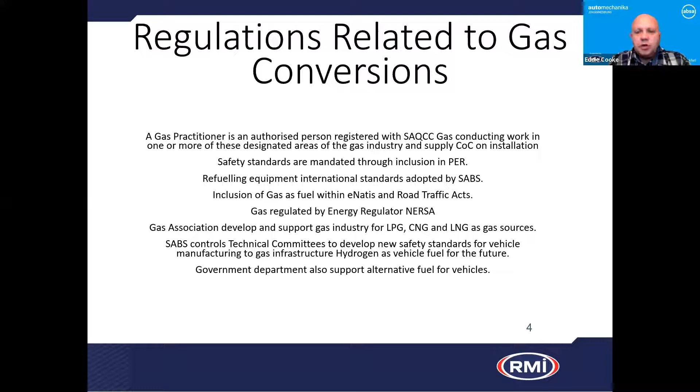What's also important is all the other governmental departments, the Department of Employment and Labour, Department of Mineral and Energy Resources, Department of Transport, all supporting the initiative of actually converting vehicles itself. Just as a background, how this all fits together, if you see the mandated regulations, firstly we've got the Department of Employment and Labour.

They use the OHS Act as their power into the industry. We've mentioned the PER, the Pressure Equipment Regulation, that looks at the gas industry itself and gas systems. And then for vehicles, we have SANS 15500, SANS 10087 Part 6, which is the LPG. There's SANS 20110 and 2067, which are adopted international standards, European standards. And then we've got the present CNG standards itself, and they all feed into the Safe Gas Equipment Scheme that would also regulate the quality of the equipment itself.

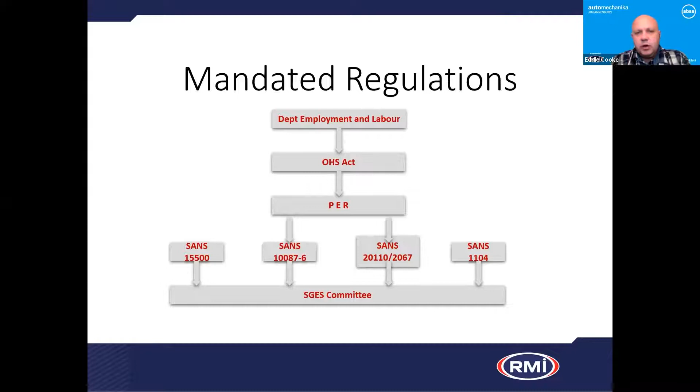But the question is, why would we want to start converting vehicles to gas? Firstly, there's more gas available in the world than the availability of oil. If we look at the current quantities of oil available, there's 5 times more gas available at this stage. And we all know everybody is moving away from a carbon footprint, reducing emissions.

This is a way to be more environmentally friendly by actually using alternative fuel sources for vehicles. Transport contributes quite a lot of emissions into our country, sometimes as high as 40%. And this is a way of actually reducing our carbon footprint itself.

Gas is also a lot cheaper, and that's why it's also much more beneficial to actually use gas as a fuel. We all know the current price hikes in fuel itself, and this would make it the ideal opportunity to start looking at the benefits of converting vehicles itself.

I've mentioned the future of hydrogen. We don't just believe in hydrogen as fuel cells, but also maybe hydrogen technologies for internal combustion. And as I mentioned before, autogas conversions

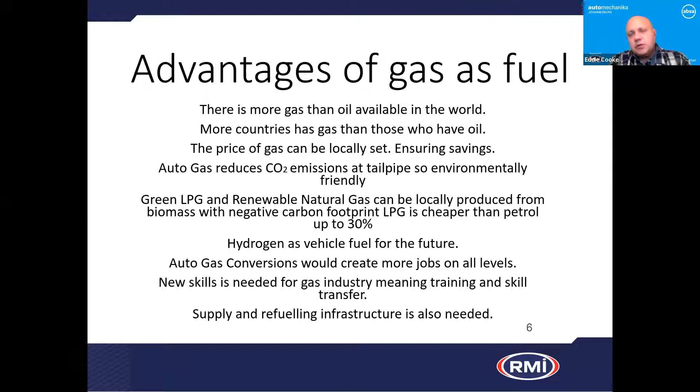has been done, but the more demand there is, the more jobs would be created, the more training and skills are needed to transfer this new technology into the market, and subsequently also we'll need more supply of refueling infrastructure, because the more vehicles there are, it's always the chicken-and-egg scenario. Must there first be a refueling station, or must there first be vehicles? You actually need both in the industry to actually make it work.

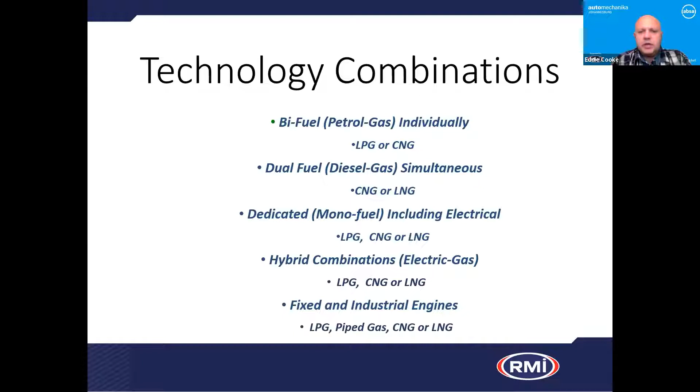There's quite a few combinations of technologies used with different applications, as you can see there, but I'll take you through it in more detail going further.

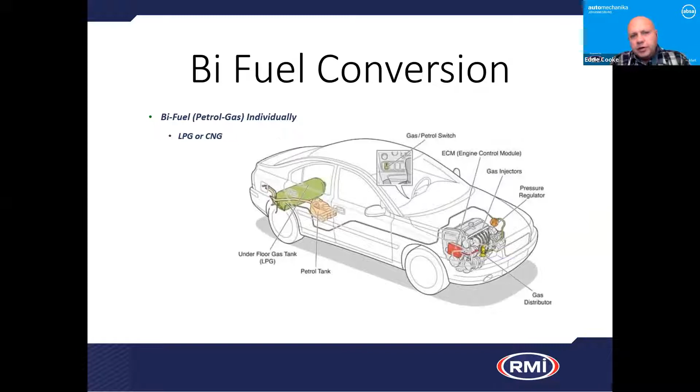Your normal bi-fuel conversion, normally LPG or CNG, which would be your petrol vehicle that you convert to gas. So you either drive on gas or you either drive on petrol. You can switch it over at any specific time.

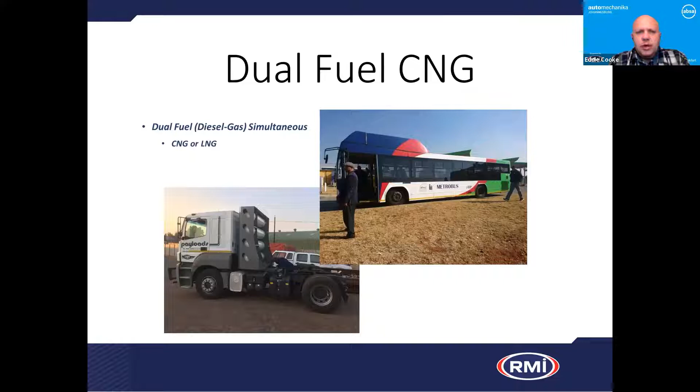Then you've got the dual fuel, and here I'm showing examples of the Johannesburg Metro bus, more than 140 buses already running on dual fuel for more than 5 years in the metro. So it's technology that's already happening in our country and being applied. Here you would normally use CNG or LNG itself.

Then further on, dedicated CNG. This is where you only use gas as a fuel source. You totally remove the petrol or diesel application and only run on gas. And this could also be done either LPG, CNG, or LNG itself.

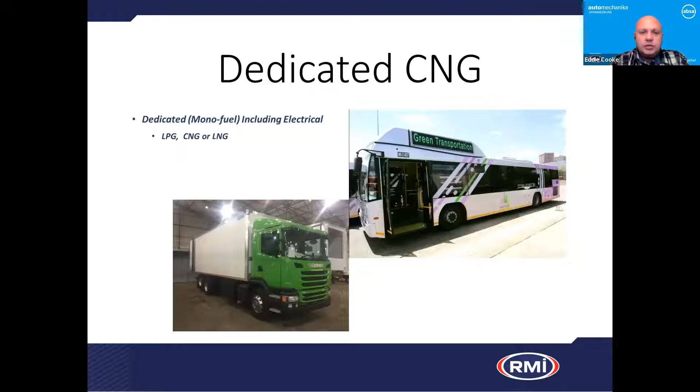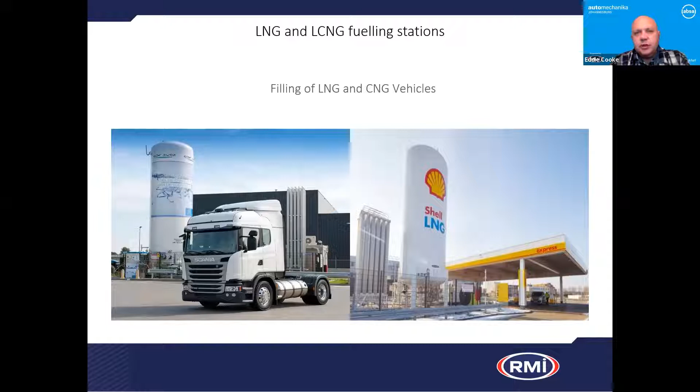And then going to the future as well, looking at LNG refueling stations, LNG vehicles. There are some tests being done currently in the country with some LNG vehicles. So this is some of the future that we are looking at, and we're starting to get ready to actually apply it.

I've mentioned hydrogen. It's a big topic, a lot of exposure to that in the last 2 years since COVID, but it will become a reality. It's all about getting to technology maturity, and that would also be a total carbon-free technology as an alternative fuel source itself.

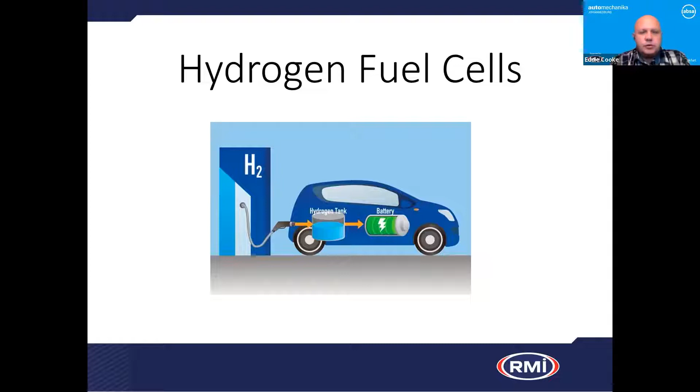There's some of my contact details, and I hope I was really able in a very short time to actually give you a background of what is needed in the industry and why it's so important to do it.

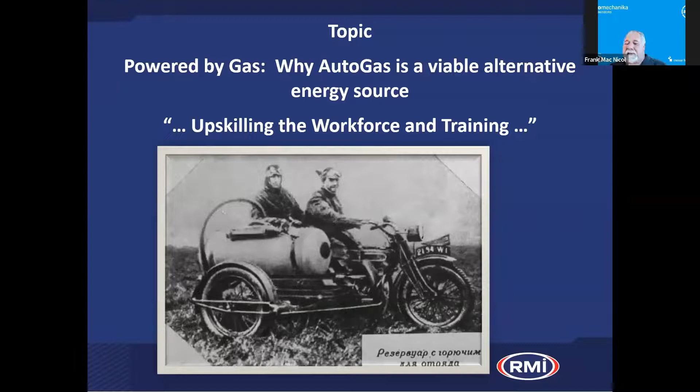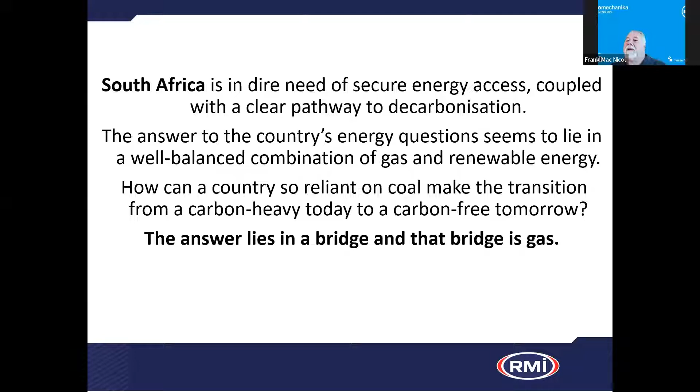So the upskilling of the workforce and training — I must take you back and then bring you to today. South Africa is in dire need of secure energy access, coupled with a clear pathway of decarbonization. The answer to the country's energy questions seems to lie in a well-balanced combination of gas and renewable energy. How can a country so reliant on coal make the transition from a carbon-heavy today to a carbon-free tomorrow? Well, the answer lies in a bridge, and that bridge is gas.

The history of Autogas begins in the mid-1930s. LPG had been discovered in Germany only a few years earlier as a condensate when compressing refinery off-gas to extract gas oil. It was sold in cylinders as propane and butane, a less refined mixture of both components. In 1934, Germany kicked off a program to increase independence from oil imports. By 1942, autogas systems had become very popular due to the scarcity of conventional fuels. The supply of LPG was then plentiful.

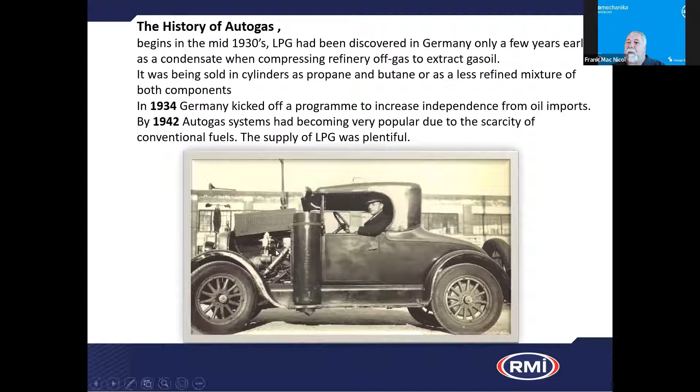German autogas consumption was about 50 times higher than what was delivered to households for cooking.

The first generation systems were developed for spark ignition engines and heavy-duty diesel engines, which was then called dual fuel. The liquefied fuel stored in cylinders or fixed tanks is fed in liquid phase to a converter, which vaporizes the fuel and regulates the pressure to a set value. The system is entirely mechanically operated with very few moving parts.

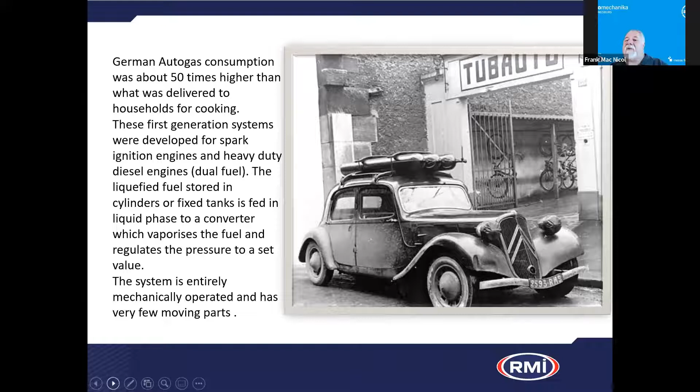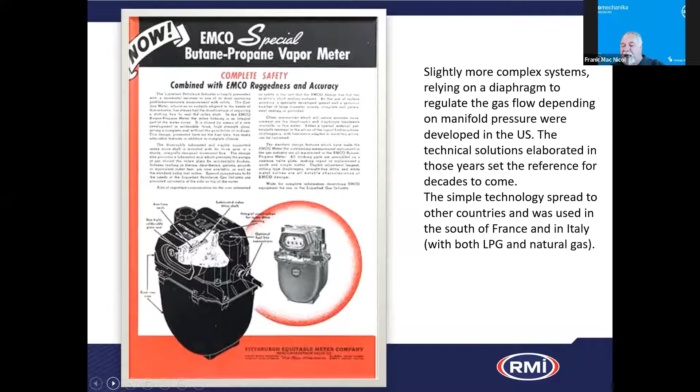The slightly more complex system, relying on a diaphragm to regulate the gas flow depending on manifold pressure, was developed in the US. Technical solutions elaborated in those years set the reference for decades to come. The simple technology spread to other countries and was used in the south of France and in Italy with both LPG and natural gas.

Strict emission standards forced the widespread introduction of three-way catalysts. This is where the trouble started, in the exhaust system of every car. The mixture needed to be monitored more precisely in order to maintain the air-fuel ratio needed for correct catalyst operation, with onboard diagnostic systems. We call it OBD today, monitoring the quality of combustion. Electronic controls were added to Venturi systems to enable fine adjustments to the mixture needed for correct operation of the catalyst. This formed the second generation of developments.

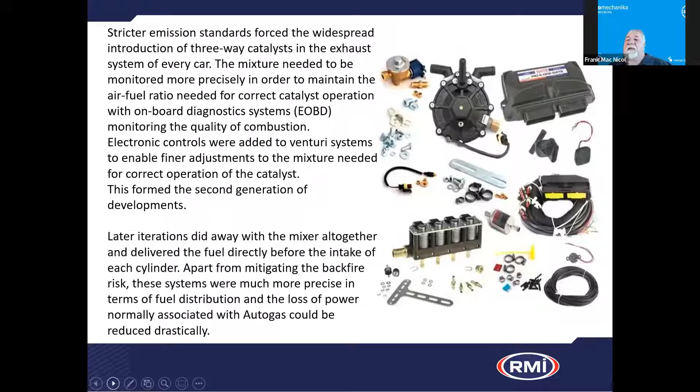Late iterations did away with the mixer altogether and delivered the fuel directly before the intake of each cylinder. Apart from mitigating the backfire risk, these systems were much more precise in terms of fuel distribution, and the loss of power normally associated with autogas could be reduced drastically.

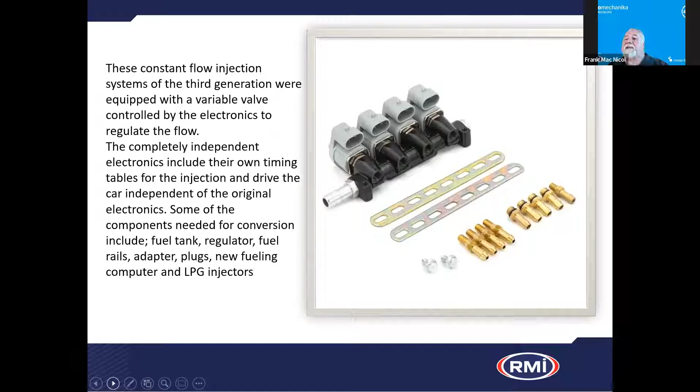These constant flow injection systems of the third generation were equipped with a variable valve controlled by the electronics to regulate the flow. Completely independent electronics include their own timing tables for the injection and drive the car independent of the original electronics. Some of the components needed for conversion include the fuel tank, regulator, fuel rails, adapter plugs, new fueling computer, and LPG injectors.

What is LPG and how is it made? LPG stands for liquefied petroleum gas, a type of liquid gas that can be used as fuel for a variety of purposes, including the powering of cars. Also referred to as butane and propane gas, or autogas in motoring circles, it is the byproduct of the processing of natural gas liquids, as well as the refining of crude oil.

While traditionally it was deliberately burned off and wasted, it is now recognized as a versatile, low-carbon fuel and used productively. Although the phrase liquid gas appears to be a contradiction in terms, it actually describes a clear gas that turns to liquid when subjected to pressure or cooling. It's this characteristic that allows it to be stored in tanks in the vehicle.

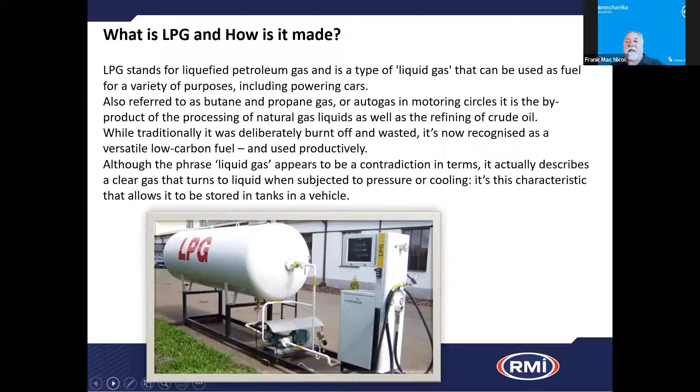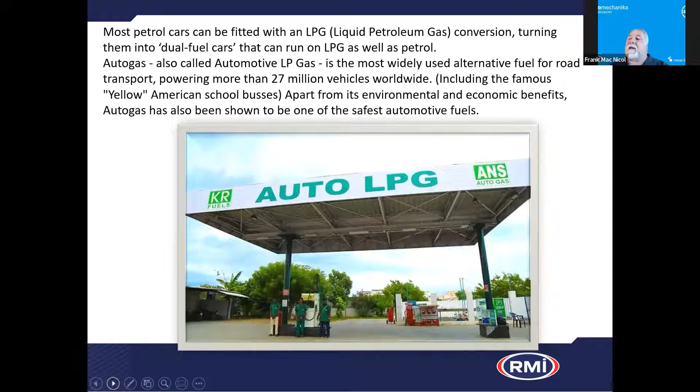Most petrol cars can be fitted with an LPG, liquid petroleum gas conversion, turning them into dual fuel cars. They can run on LPG as well as petrol. Autogas, also called automotive LP gas, is the most widely used alternative fuel for road transport, powering more than 27 million vehicles worldwide, including the famous yellow American school buses. This is done for health reasons, by the way. They found that children on these buses did better in school than those that used to travel on diesel buses.

Apart from its environmental and economical benefits, autogas has also been shown to be one of the safest automotive fuels. While there is considerable awareness of the environmental and economic benefits of autogas, it's also important to note that autogas is an especially safe vehicle fuel with an outstanding health and safety record. With over 27 million vehicles on the road worldwide, autogas has demonstrated a strong safety record, better than vehicles operating on traditional fuels such as petrol.

Autogas vehicle tanks are manufactured to meet or exceed the most stringent standards, and rigorous crash tests demonstrate that autogas tanks are stronger than conventional fuel tanks. Constructed from composite and carbon steel, they are 20 times more puncture resistant and will survive much greater impacts than a typical petrol, methanol, or ethanol tank.

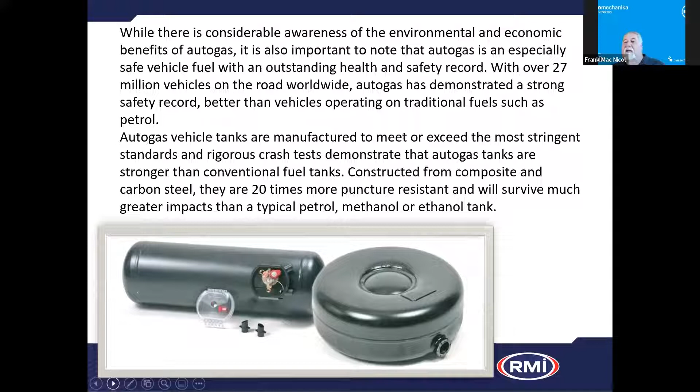So, in conclusion, there are compelling environmental, operational, and safety reasons for including autogas in any strategy aimed at promoting alternate fuels for road transport.

Nigerian Technical Advisor for Petroleum Resources says the autogas scheme of the federal government will create 2 million jobs annually. In South Africa, we have a golden opportunity to introduce LPG into our market.

We need gas conversion staff. We need gas supply staff. We need courier companies. We need taxi and Uber type vehicles that will run cheaper. Security companies will benefit, municipalities will benefit. They will benefit financially and be green. Provinces will benefit and also be green. Government will benefit and also be green.

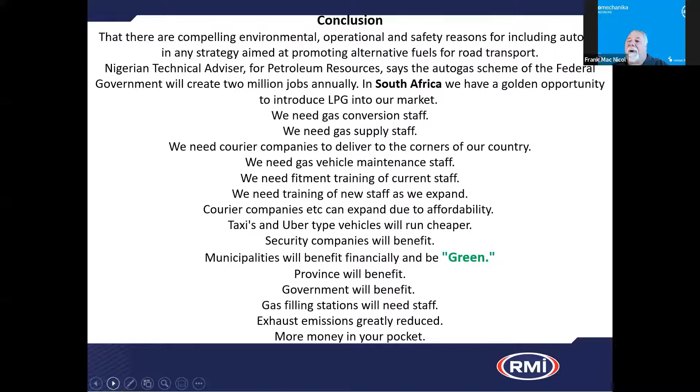Gas stations will need staff. Exhaust emissions will be greatly reduced. At the end of the day, there will be more money in everybody's pocket. Thank you so much, we're ready for questions afterwards.